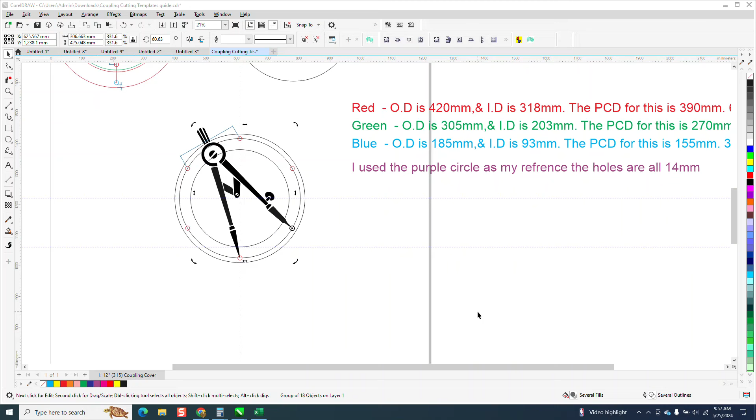Somebody sent me an email yesterday, they want to draw out flanges. I'd never heard of PCD, that stands for pitch circle diameter. And then there's chord length. He sent me a couple of videos.

So your outside diameter of your flange is 420 millimeters. I've changed mine to millimeters. The inside, the ID, is 318. The pitch is 390, and he's got 6 holes that he told me in the email are purple, stands for 14 millimeters.

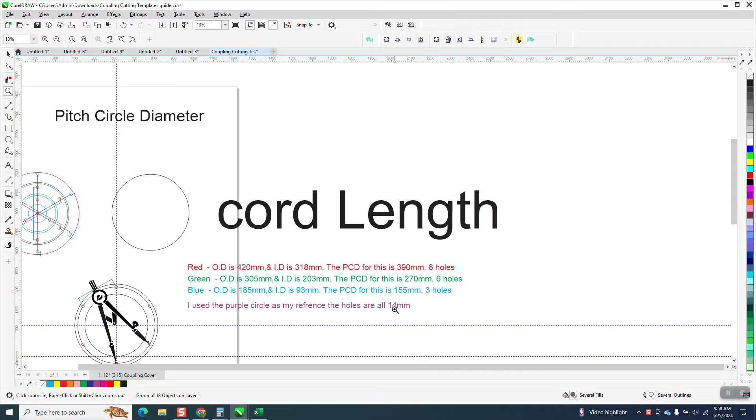But in the videos he sent me, people are using a protractor or a compass to figure out the distance between the holes to mark them on metal. Well, you don't have to do that in Corel.

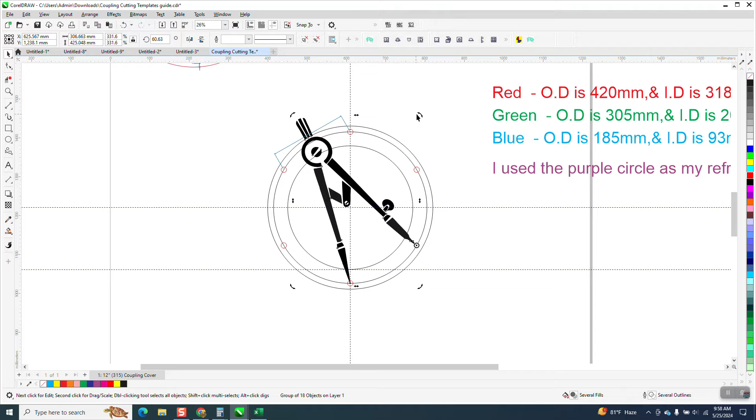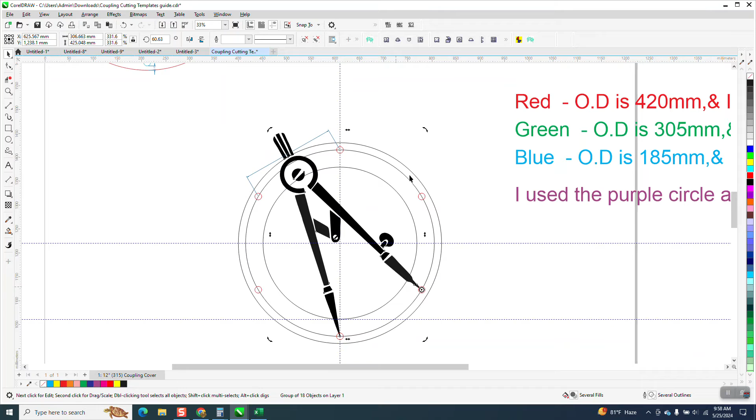If you look, I've got this thing set up where if we turn it - let me go back. Right here, the holes are 195 millimeters apart. I've got this imaginary compass set on 195 millimeters. I've got the rotation on this pin right here. So if we rotate it, it's going to end up right where the other hole needs to be. So that's how you would mark the metal if you were doing it for real in a shop, and it's dead on. I mean, it's dead on.

But you don't have to do that in Corel Draw. If you're going to mark it out, you don't have to do that.

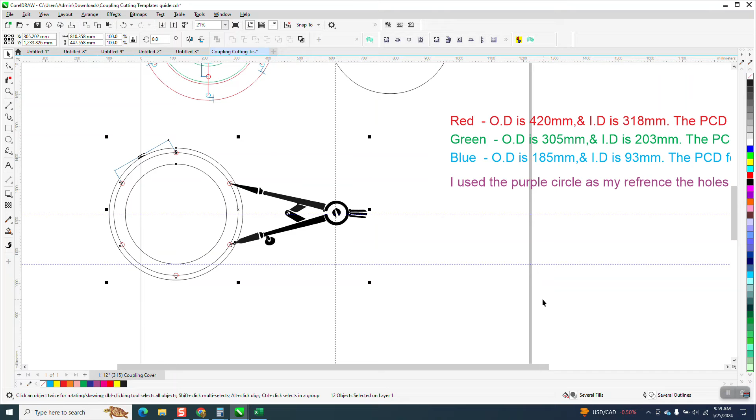Let me set my nudge factor. Let's set it on 500 millimeters, I don't really know what that is. Let me just nudge that out of the way. So he says his outside diameter is 420.

First of all, I'm going to get rid of my indexing line. I got rid of my rulers - you know what, I don't want to get rid of them, I want to get rid of this one. He's working on a weird sheet of paper. Let's hit P and put it in the center of the page. So it's all this - the red outside is 420 millimeters.

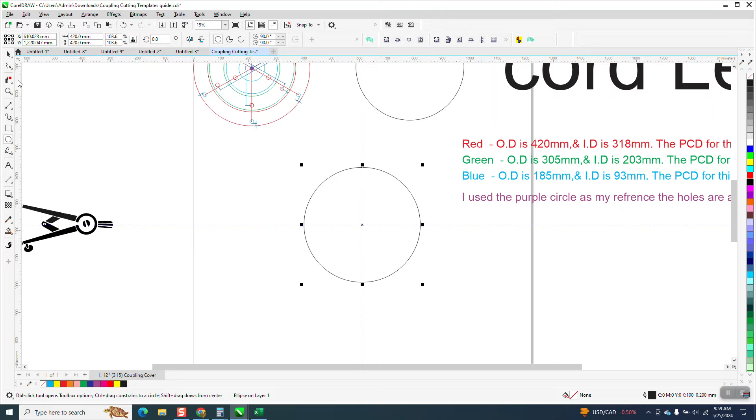I've changed mine to millimeters. So I'm going to go 420, and I'm going to hit P. The inside is 318, so I'm going to Control D and make a duplicate, and it's 318. For the one I'm doing the video for, I changed the nudge factor to 0, 0.

And then the PCD is 390, so I'm going to Control D and make a duplicate of that. Let me make sure I didn't... Control D and make it 390.

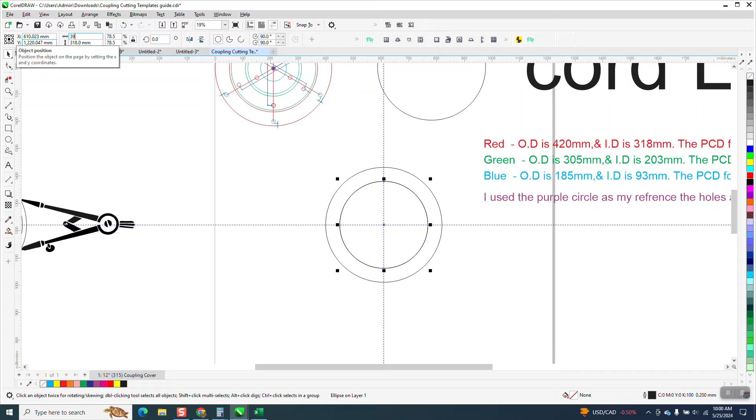Now, he mentioned a 14 millimeter hole. So I'm going to take an ellipse, it's not very big, and just barely make an ellipse. And see, that's 22, so we're going to make it 14. I'm going to hit P and put it in the center of the page.

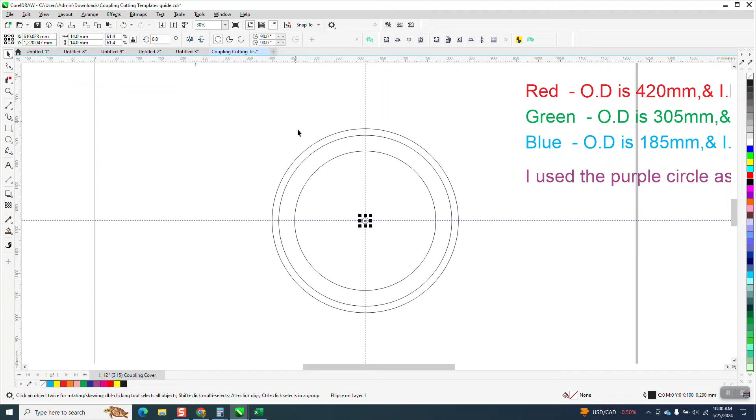He also said he needed 6 holes spaced out evenly. So what we're going to do is take this ellipse and I'm going to start moving it, then hold down the control button till it snaps right to our pitch diameter. That's all you have to do in Corel.

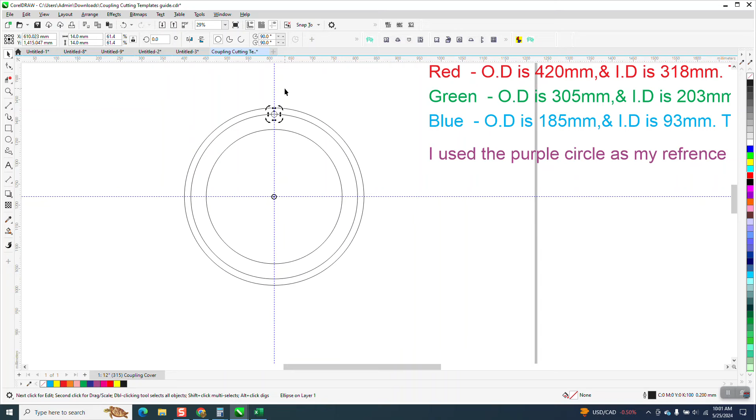Now what we're going to do is take it - I'm not going to make a duplicate, I'm going to double click it. I'm going to move my rotation to the center. I actually hit it off, I got my Control Alt C to do that. But now that I've got my rotation, I'm going to go up to Windows, Dockers, and Transform.

There are 6 holes, divided by 360 is 60 degrees. Whenever Corel says copy, that means they're going to use the one you've already got. So you need 6, so you only need 5 copies. And there's your holes.

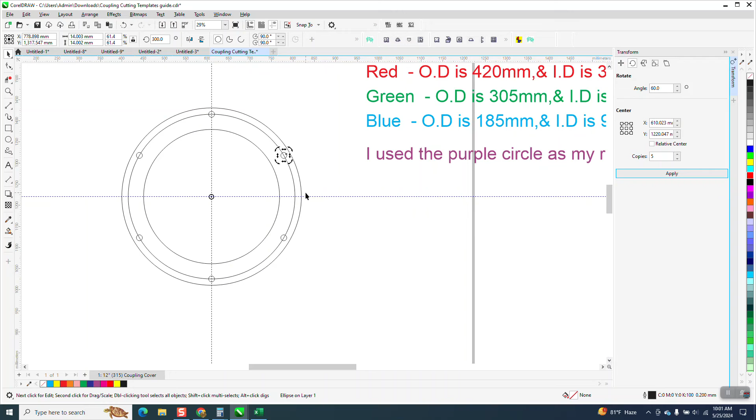Equally spaced apart. And if we test them with - let me get rid of the indexing line because sometimes that'll interfere - let's get our parallel dimension tool and go from this quadrant to the center. 195 millimeters. Every one of them will be perfect.

And what I was doing, I mean, if I would cut this out of my plasma cutter, but if I was going to cut it out by hand somehow, I would print this out in Corel and then mark it on the paper. So we're 195 millimeters apart. That is the chord length.

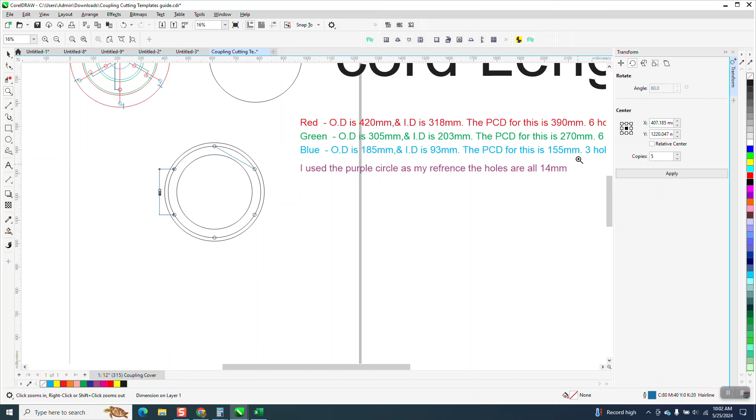So I've learned a new technology, new terminology today by doing this. But this would work on any of these - you know, if you just want 3 holes or 6 holes, you just divide it by 120 degrees. Anyway, I hope that was the answer you were looking for, and thank you for watching.